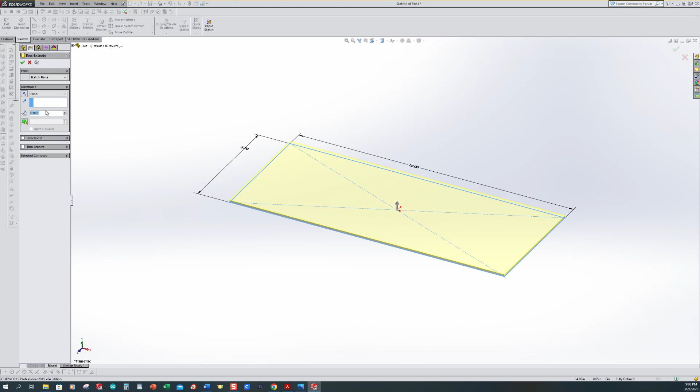Hey, welcome back. Tonight's lesson we're going to create a mechanical assembly. We're actually going to create a motion study with it as well. So the idea is this is going to rotate. This pin is going to come into one of these slots, rotate around, and this part's going to stop until the pin rotates around and picks up the next slot and moves it forward. Just a few simple parts - we've got a base, a wheel that's going to rotate, and a drive wheel and a drive pin. So let's go ahead and get started.

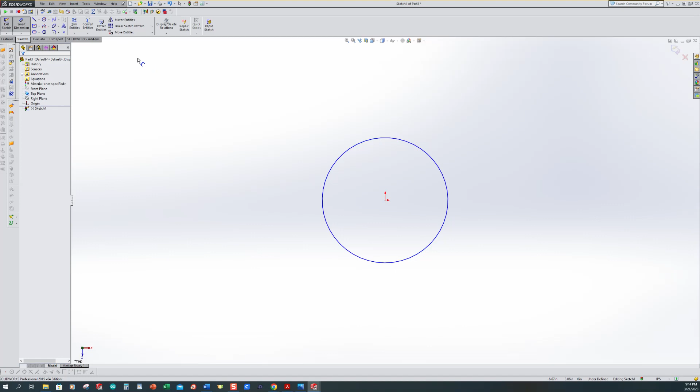Make sure that you got SolidWorks open. We want to create a new part, and we also want to be in inches. We're going to start with the base of it, that little wooden looking piece. Make sure that you are in inches down here in the bottom right, then select extruded boss base.

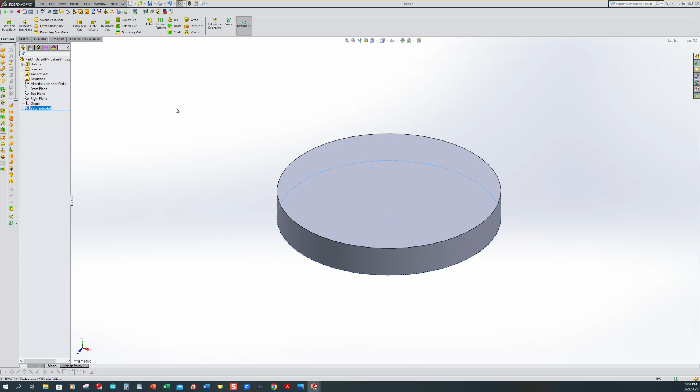We want to pick the top plane. I'm going to use a center rectangle, pull it out and place it down like this. Then I'm going to dimension this thing - let's go with 12 inches long and about 5 inches wide. And we're ready to exit our sketch here, so let's go exit sketch.

I think I want to make this thing about 1 inch thick, and accept it. Now I want to place a couple of holes in here for our drive mechanism.

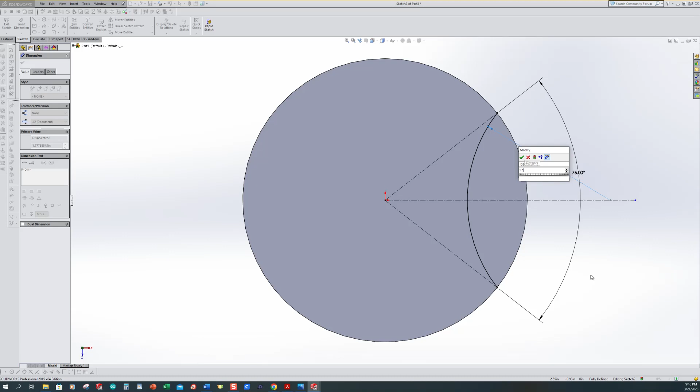So let's select extruded cut, pick this top surface. I'm going to come up and select a midpoint line - I want this thing to be centered up. I'm going to pull it out and place it down, and I want to make that line for construction. I also want to add a couple of circles on the ends of this, so I'll pick a circle here and a circle here, and add a relation to make that circle that's already highlighted blue and this circle equal.

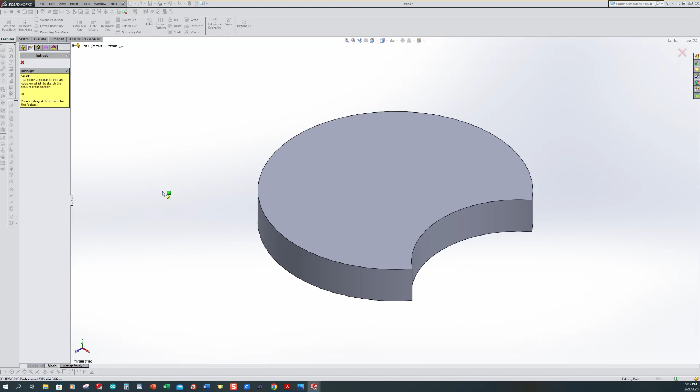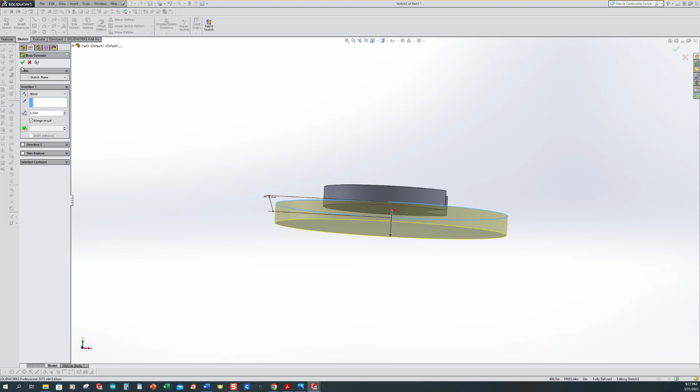Then let's dimension these things - let's call them 0.75. Alright, so now the length of this is going to be about 4.5 or 4 1/4 inches overall length. Let's go ahead and exit this, and we want to cut through everything, so let's just say through all, just in case we change our thickness later. And now we have a couple holes in here.

Let's go ahead and put us a couple chamfers on here, or a chamfer all the way around it. So let's pick a chamfer, make the size maybe 0.3, and we'll pick this edge, this edge, this edge, and this edge, and accept it. And I'm going to use my Control 7 command, and now we've got a part, our first part.

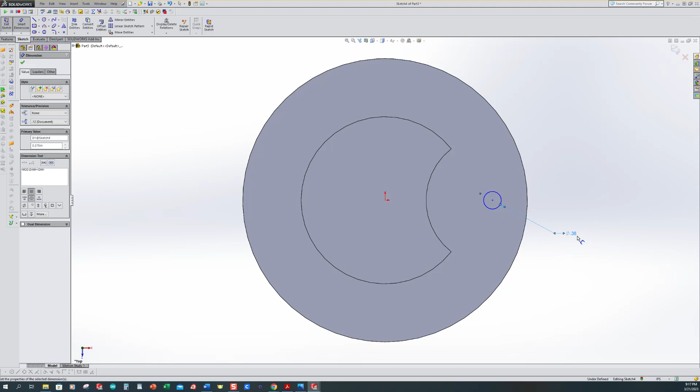So let's go ahead and save it. I'm going to create a new folder - I'm going to call mine the junk folder, and I'm going to call this the base. Alright, that's probably going to be the first part that we use in our assembly because we want to put everything on the base itself.

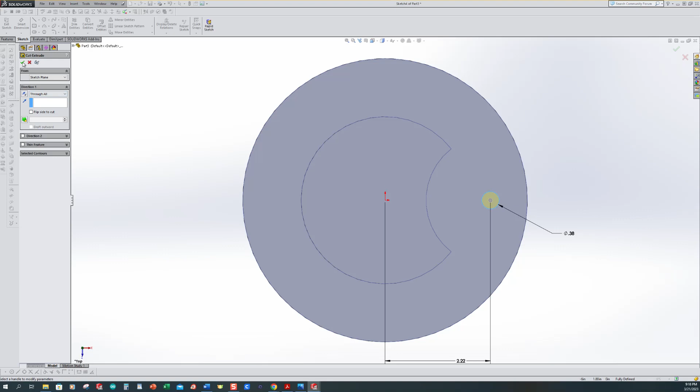Okay, alright, so the next part, let's go ahead and start with the wheel that's going to rotate. So let's create a new part. We want to select an extruded boss base, starting on the top plane. I want to start with a circle - let's give this about a 6-inch diameter. We want to go ahead and exit this sketch, and we're just going to cut away at everything else, so let's make this 1/2 inch thick.

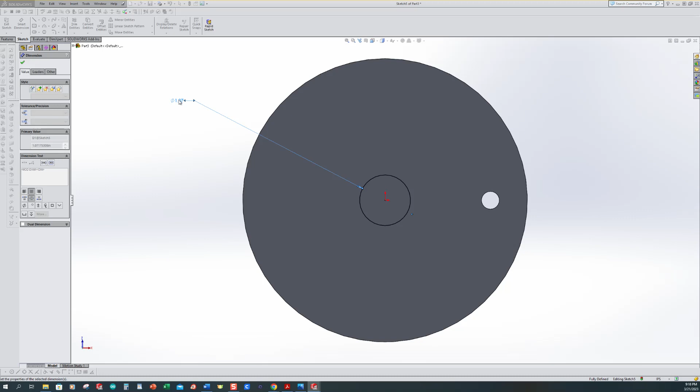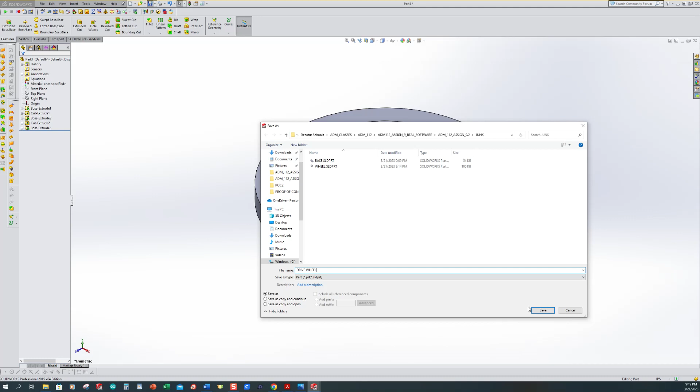Alright, so now we've got a couple slots in here. If we look right here, we got these slots - let's go ahead and cut those in there. So extruded cut, I want to pick this very top surface. I want to use this slot command - we'll start up here at the top where it's oriented directly above our point of origin. This is a 3-click command, so you got to click where you want it, click about how deep you want it, and then how wide you're going to want this thing.

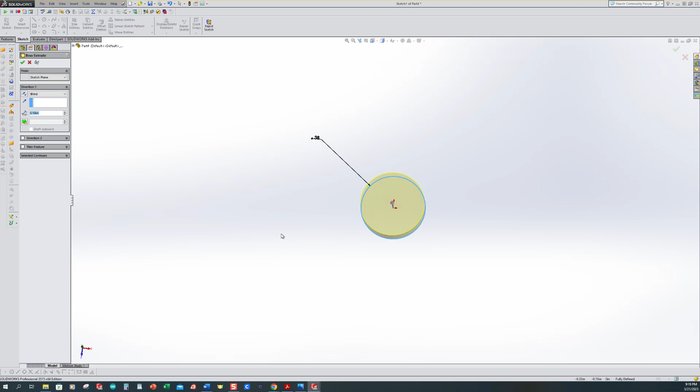So let's use a smart dimension. I think I want it to be about 3/16, so let's make it 0.188. And then we need a distance up, and this should fully define it. So I pick our origin and I pick our arc, and let's go ahead and just make that 1.5. So we now have a slot that we're going to cut in here, so we exit our sketch.

We want to cut through all and accept it. Now the next thing we're going to need is this little arc that we have around here, so let's go ahead and create that.

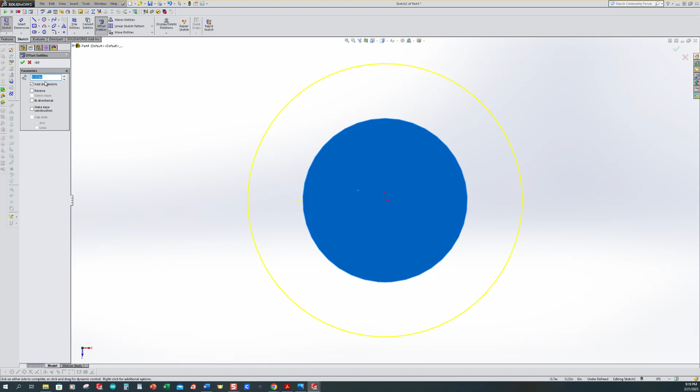Another extruded cut. We want to pick this top surface. I'm going to use just a center line, pull it out, make sure it snaps horizontal, and then grab another circle out here, pull it out, and place it around there somewhere like that.

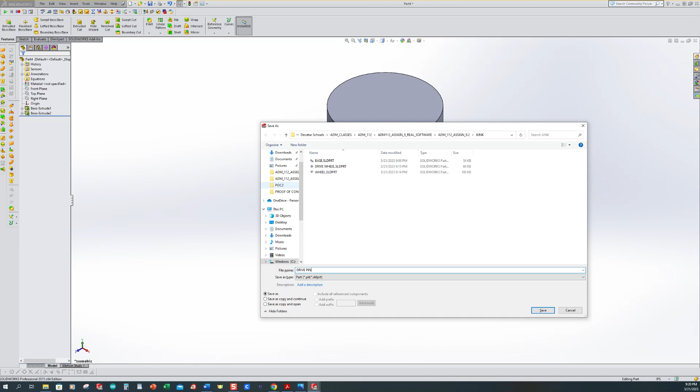Let's give this a dimension of 3.54, and a dimension here of say 4 1/4. So we're now fully defined, and we can cut this through everything. We exit this sketch and cut through all.

Alright, so now we got this slot here and this slot here, but that's not really a concern. We want to create a circular pattern with this because we want to pattern all these.

So I come up here to the very top. What is my axis to pattern around? I'm going to roll it around and pick this face here, so that puts an axis right in the center of it. And now the features or faces that I want, I can pick them over here in the graphics area.

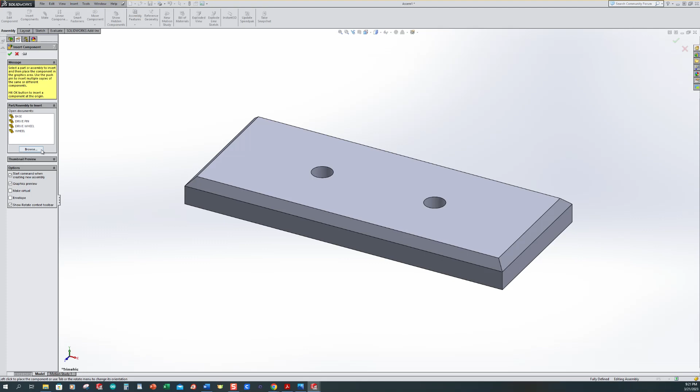I'm going to expand my part number out, and pick the cut, and pick the second cut as well. Alright, so that gives us a preview of what this is going to look like, and that's what the top of our part is looking like.

So use the Control-7 command to put it in an isometric orientation. Now I want to put the little axle on the bottom of it, and I also want a little step up as well. So let's create another extruded boss base, and I want to roll it around and pick this bottom surface.

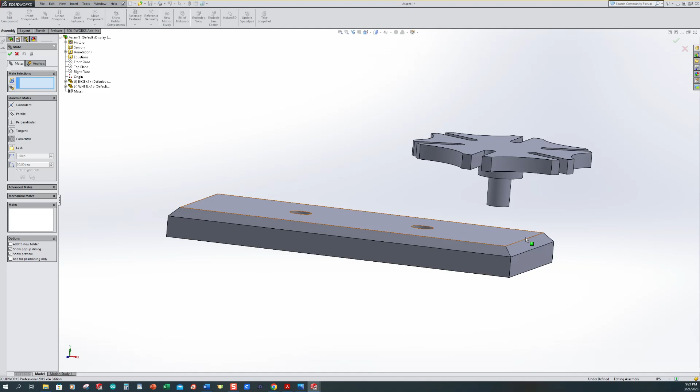I'm going to pick a regular circle, place it here, and give it a dimension of, say, let's go 1.5. Alright, and that's good enough.

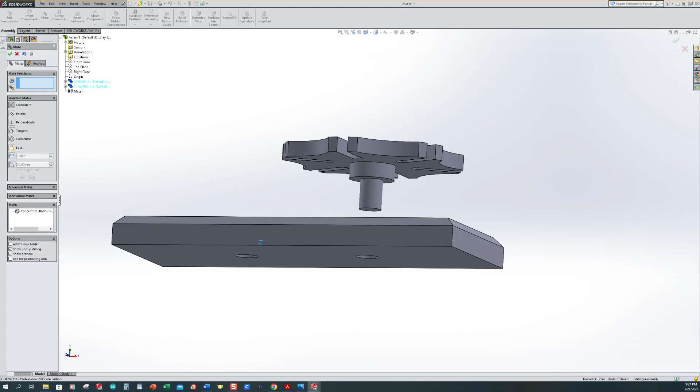So we want to exit the sketch. We should still be in extruded boss. I'm just going to leave it as a 1/2 inch, so we'll accept that. Now this is where it's going to rest on top of our wooden block.

So let's create another extruded boss base for the axle to go through the hole. Pick that bottom surface, place another circle on the center, one click, pull it out and release it, and we know that hole was 0.75, so let's go 0.75, and we're ready to exit our sketch.

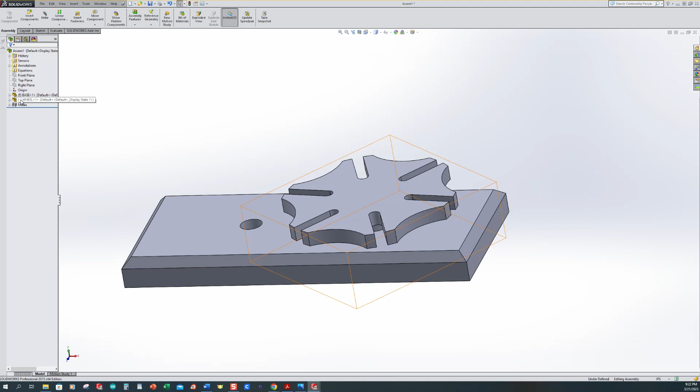And I think our base was 1 inch thick, so we'll go ahead and accept it. Control-7, and we're good with this particular part. So let's go ahead and save this one. Let's call it wheel.

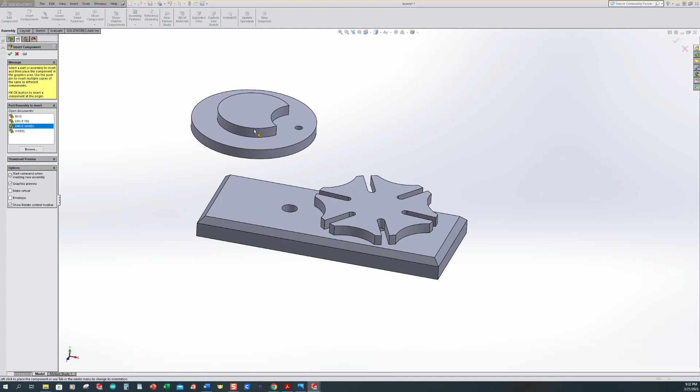Alright, we're ready to move on to our third part. So let's create a new part, and we want to create an extruded boss base on the top plane. Start with another circle.

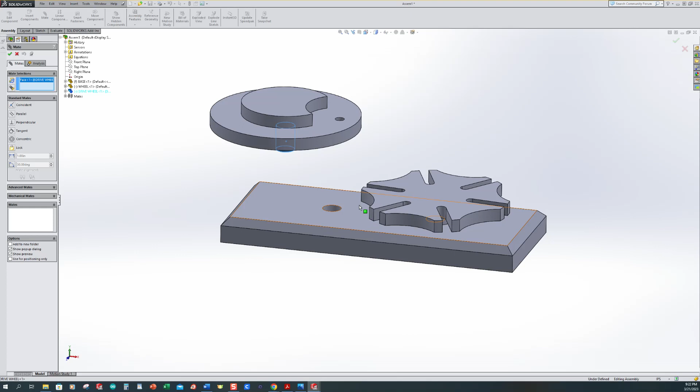So what we're going to try to work on here is this piece right here, and then we're going to cut this little half moon out. Alright, so this part, let's go with 3.54 on our diameter, and we're going to exit our sketch.

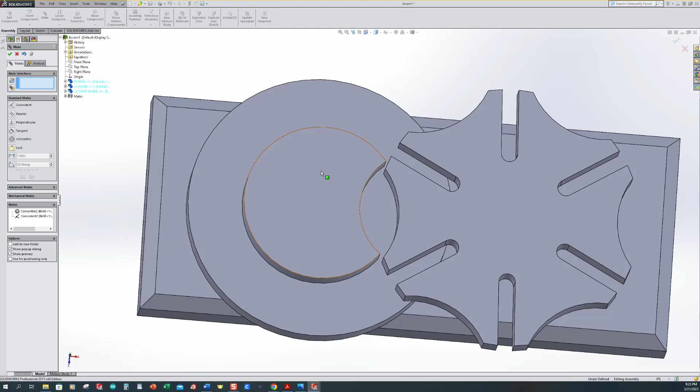And we're going to make this a thickness of, say, 1/2 inch. Now we want to create a cut out here that's going to rotate around. So let's come up and select extruded cut. We want to pick this top surface up here.

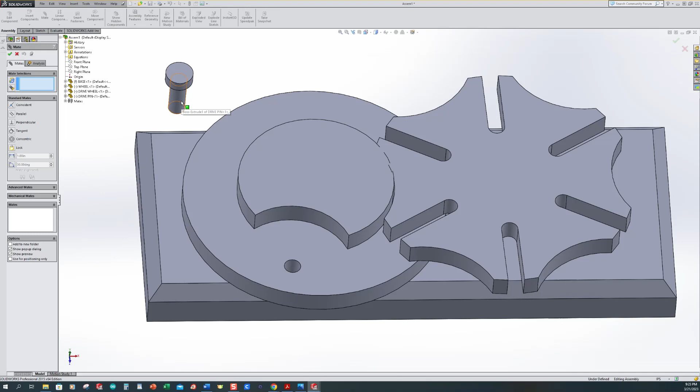I'm going to draw me a couple of lines, so I want center lines. Alright, so now I'm going to come up and grab me a 3-point arc. I want to add some more relations.

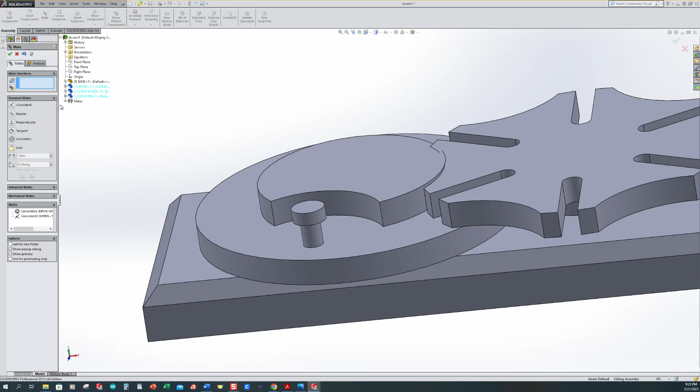I want to clear this out. I want this line to be equal, and I'm going to clear this out again. I want this point to be coincident with that.

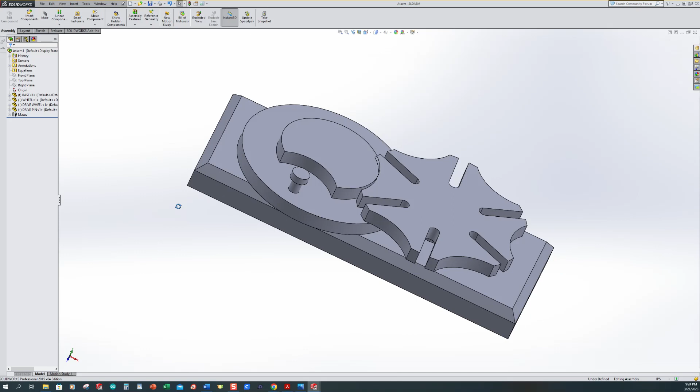This one to be coincident with this, and I know that we got 6 of these things, so I want this to be, it would be 75, but I want to give it an extra degree of clearance, so let's give it 76 degrees.

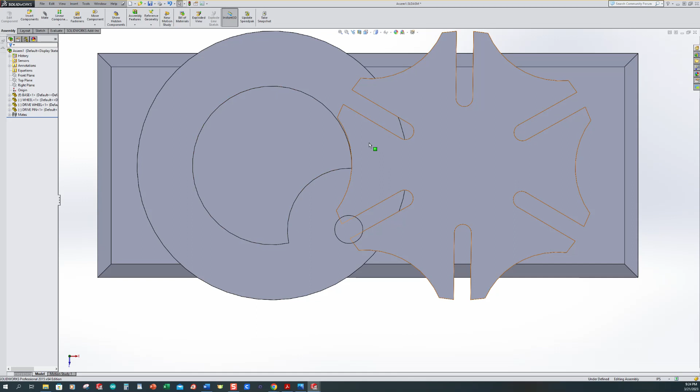And now let's try something else. Let's go add a relation. Let's see if we can make this point, this line, and this point symmetric. Okay? And now, the center of this, let's just make this 1.383.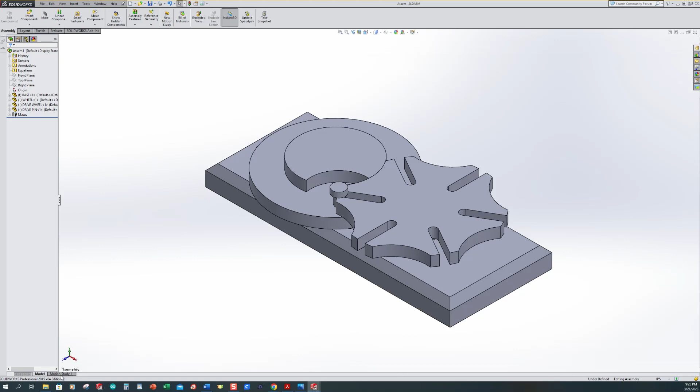Alright, so now let's exit our sketch. We want to cut this through all. So now we have this little moon shape on here.

Now, Control 7. I want to create an extruded boss base on the bottom of this thing. Let's come up here and add a circle. The last one we started with was 6 inches, so let's keep this one at 6. This is fully defined, so let's exit this sketch.

We still have a 1/2 inch. We want to make sure that merge results is checked. So we now have this.

Now we need to place a hole out here, where our drive pin is going to go. Let's select extrude cut. We're going to pick this surface or face, and I'm going to put a hole here, or a circle there.

I want to add a relation. I'll clear this out. I want to make sure that my center point and my origin are horizontal. And then let's give this maybe 0.375 - that's the diameter of it.

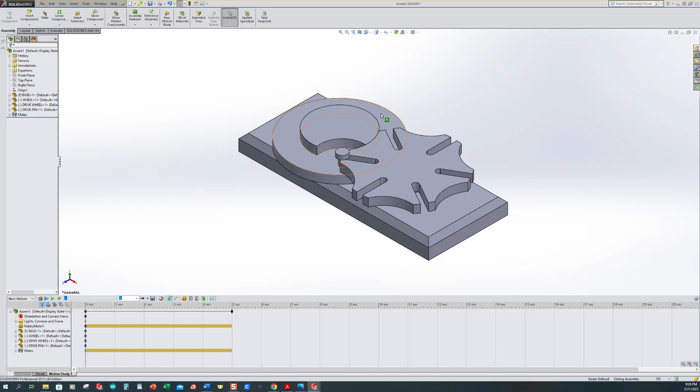To verify it down here in the bottom right, exit our sketch, and we want to cut through all.

And now we also need to do the same thing on the bottom here. This time I want this to rest on the surface itself, so let's just put a little drive pin or a drive axle down on the very bottom.

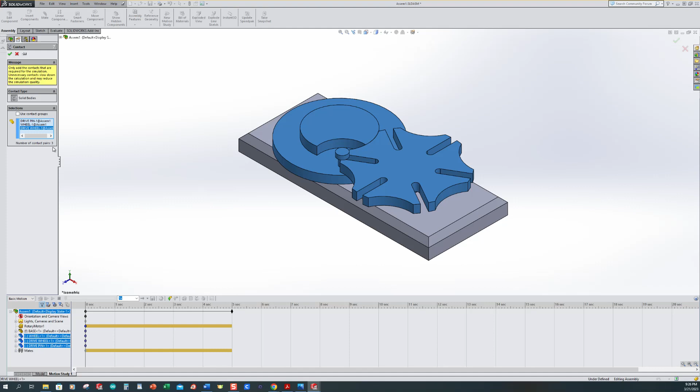So pick the bottom, come up and grab a circle, put it on the origin, pull it out, place it down, let's dimension it - 0.75. And we exit our sketch.

We know that the distance of the thickness of our base is 1, so let's give it a 1 inch dimension. Accept it, Control 7, and I believe we're done with this particular part.

So let's go ahead and save this. Let's call it drive wheel.

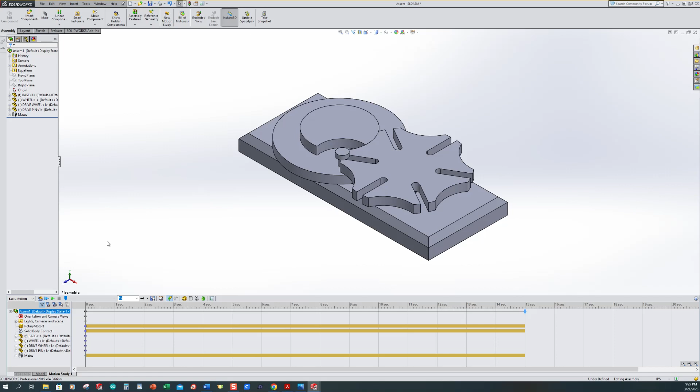Alright, so now we got one more part to make. Let's create a new part. It's just that little bitty pin, so we want to create an extruded boss base on the top plane.

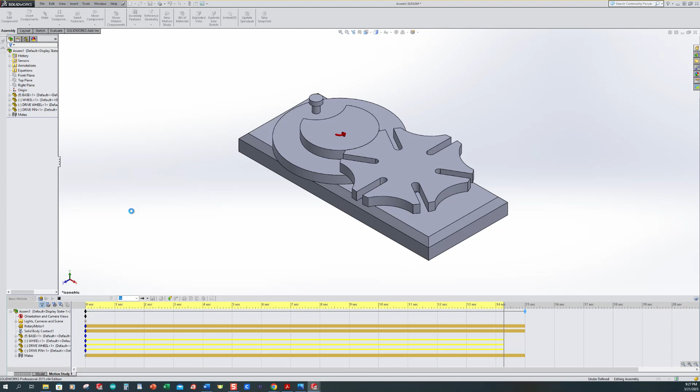I'm going to start with a circle here. I think the hole that we put in our last part was 0.375. So let's exit our sketch now that we're defined, and we want to make that 1 inch tall.

And now we're going to try something a little bit different than what you've done before. So we got this little pin, little dowel pin. We want to create an extruded boss base up on this very top face.

Now I'm just going to say offset entities. I pick that face. Let's make it 0.125 larger. And we accept it - so it created a sketch for us, and now it's always going to be 1/8 of an inch larger than whatever size the pin is.

So let's exit our sketch. Let's verify that it's going uphill. Let's not make it an inch tall - let's make it like 0.25 tall. Alright, so go ahead and accept it.

Control 7, put it in an isometric view, and let's save it as well. We're going to call this the drive pin.

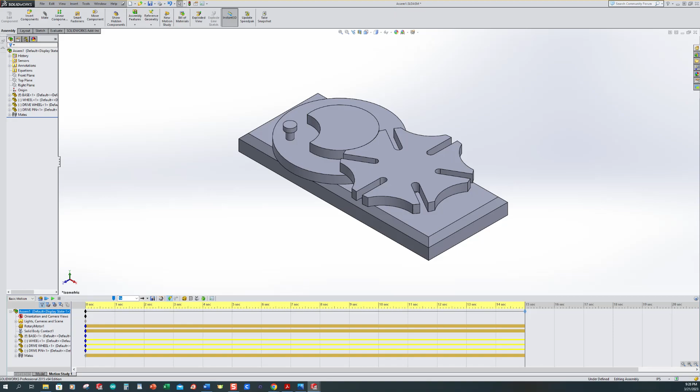Alright, so now we've got all 4 of our parts made. So what we want to do is create an assembly of this part. Come up and select New. Make sure that you're not selecting part - make sure that you go ahead and select Assembly, then OK.

Now notice it's got all of our parts over here. The one that we want to start with is the base because it is the most logical, so I select it. If I move my mouse out over here and place it down, it becomes a little bit problematic, but really not that big of a deal. What I want to do is use this green check, and then it places it where I actually modeled it. So now we have one part, and that part is fixed, so we're ready to move on to the next thing.

I want to move up here to where it says Insert Components, drop the chevron down, and insert a component. Let's go with the wheel, and I'll drag it out and place it over here somewhere I can get to it. I can rotate this thing around so we can see what's going on.

Now I want to put it in this hole, so this is where the mating command comes in. We select a mate, and I want to select concentric mate, so we want the shaft and this hole to have the same center. I'll pick that shaft, then roll around and pick the face of this cut, and it's going to move it over to where the two axes are centered up.

Now the next thing I want is a coincident mate, so we're basically saying these two faces are going to meet. I'll rotate this around where I can take a look through and see the bottom of this part, but I'll roll it around a little more. I want to pick that bottom face and the very bottom of our base, so when I rotate this around, I go ahead and accept it.